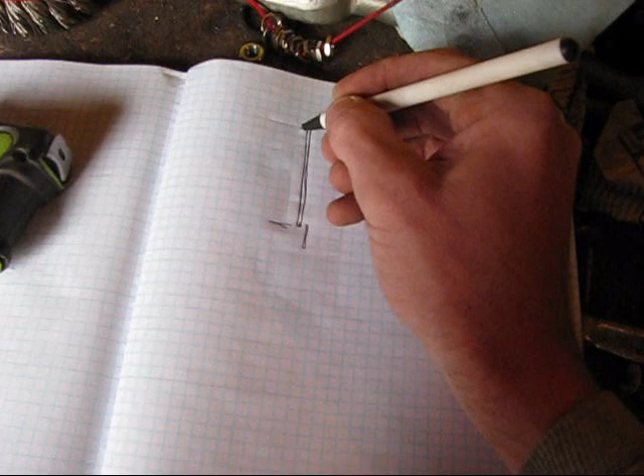So we're going to take one piece of this tubing, and it's .095 wall thickness, not 1/8 inch, a little bit lighter. That's about 6 feet long. We're then going to cut a piece of solid rod that's 1/2 inch thick at 14 inches. It's then going to slide inside of the tube.

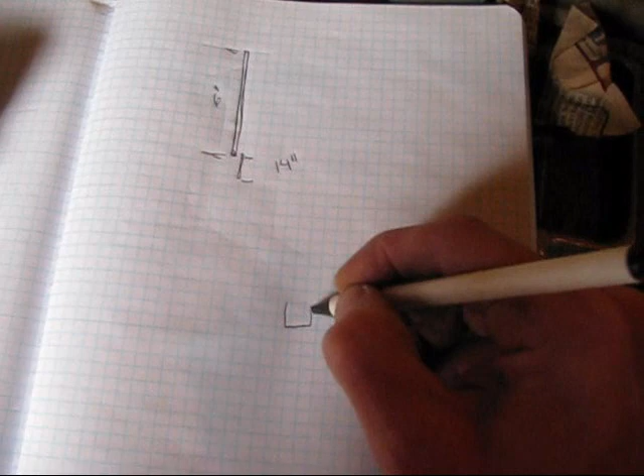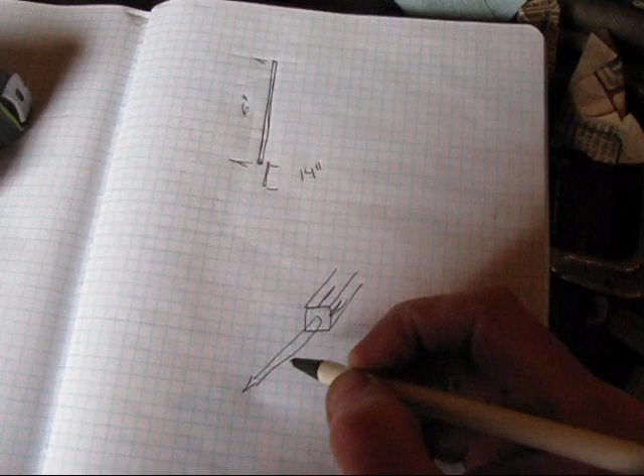Actually, what I'm going to be doing is cutting slots into the tube like that using my cutting wheel, and then I'll take my hammer and pound in the corners, so when I put the 1/2 inch round bar in there, which will then be grinded to a point so the thing will be able to stick down, once I pound those in, I'll weld all the way around that.

Then I'll be putting in, I don't know, maybe whatever scrap I have left. Well, no, let's jump to the first one here. The first top bar that'll be going out will be the same material.

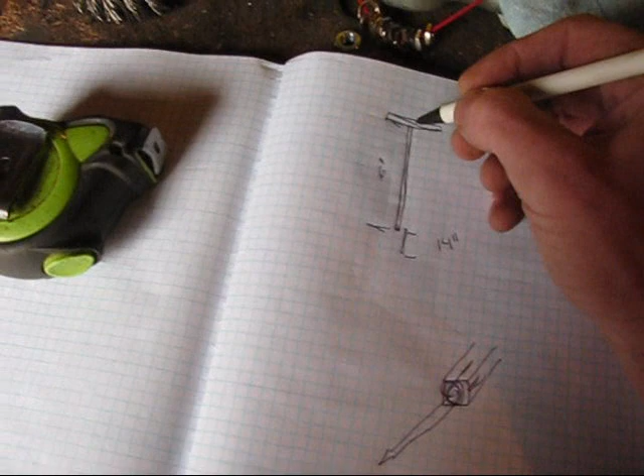It's hard to draw while I'm looking through the camera. Same material, 1 inch by 1 inch, .095. This will be cut at 21 inches. So we have 1 inch right here, and then 10 inches overhang.

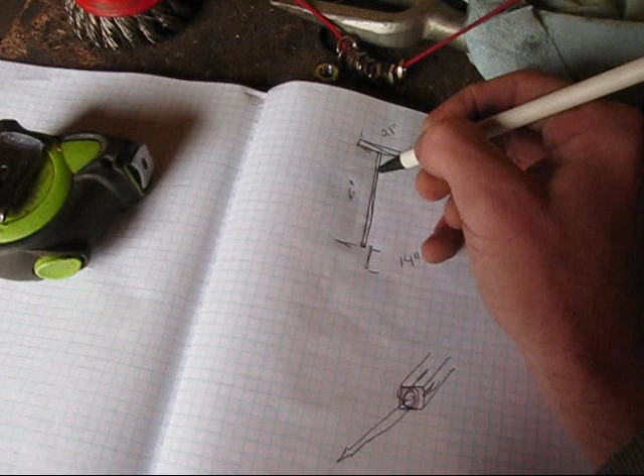Then we're going to come down, I don't know, a few more inches. I'll figure that out and explain it here as I go. And then we'll weld on another bar on one side and weld on another bar on one side. So we'll be able to put feeders right here hanging down, feeder over here, and then feeders right here for their birds.

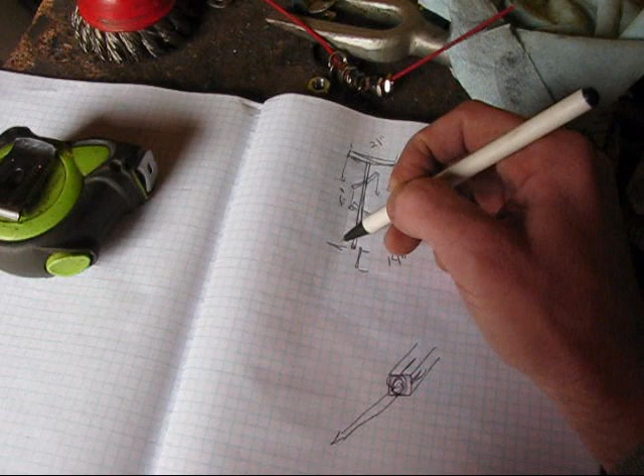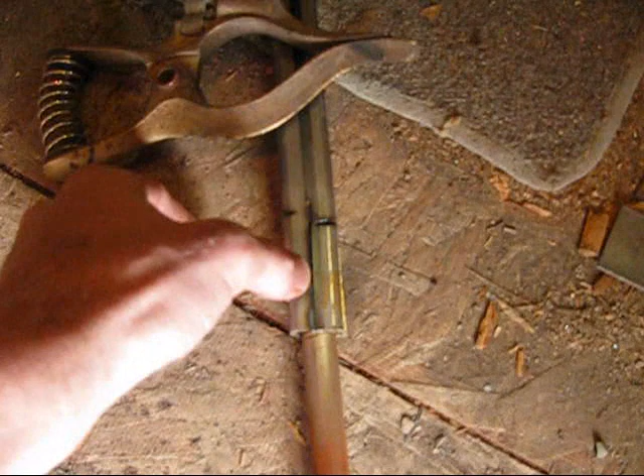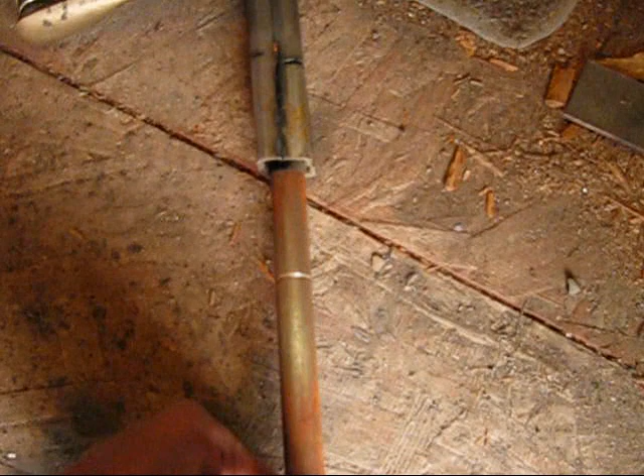Alright, just cut the grooves in there and pinch two sides together. So the bar that's cut at 14 inches is going to go inside of here 2 inches. It's sitting on a stack of staples there. So now all I got to do is line it up straight and weld it.

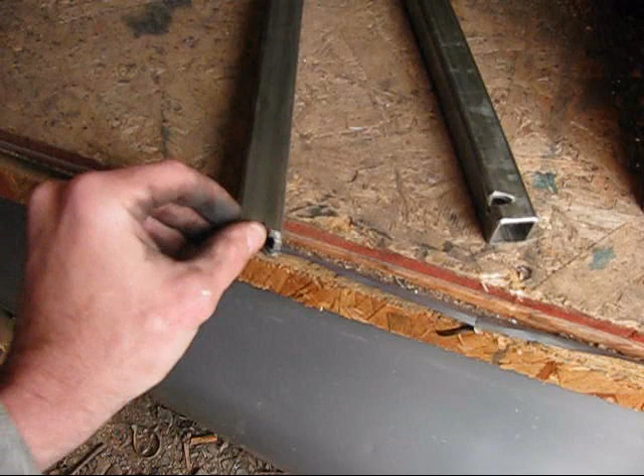Okay, alright guys, I decided to snazz this thing up a bit. Instead of just welding this on square, I pulled out my grinder and put 2 little notches on the side here. I'm going to put it like that.

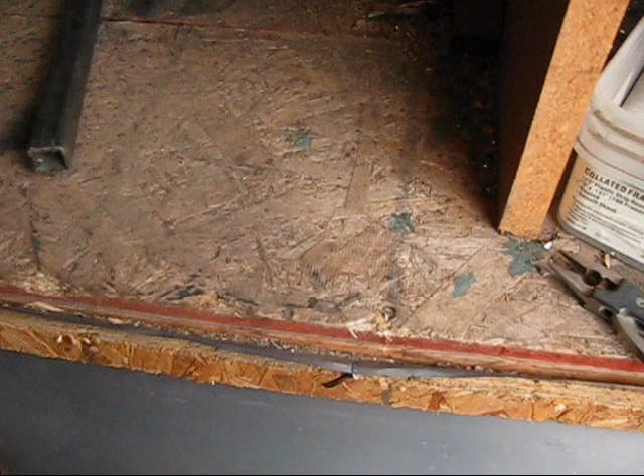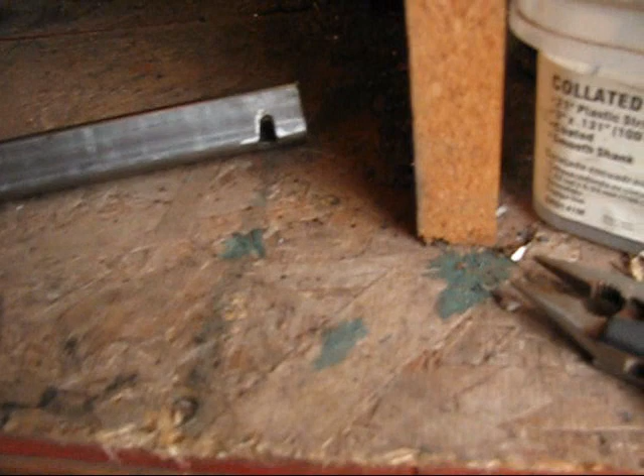Then I took my square tubing for the top, and this is cut at 21 inches. What I'm going to do is figure out where the center is at, right where that black mark is. And we're going to weld this as a diamond shape instead. Then those 2 slots will be where the wires are going to go for the feeders. So, yeah, let's weld this bad boy up a little bit.

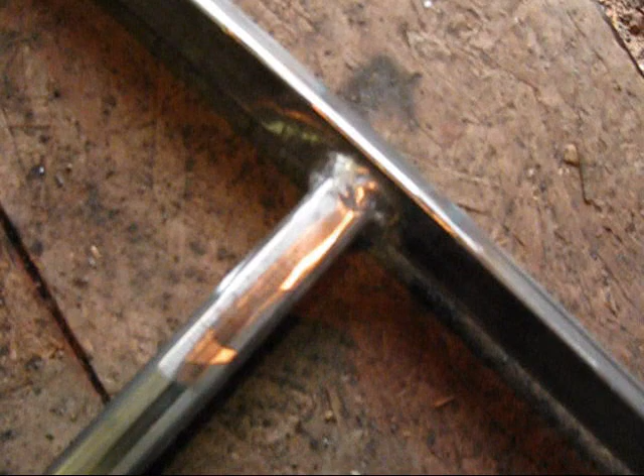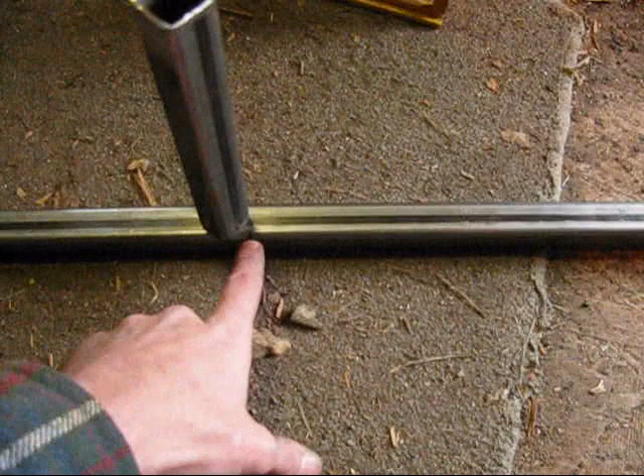Alright, well, we got that all welded up, and cut the grooves in the ends so they can put the wires through. So what I then did is measure from the tip here, measure down 20 inches and made a mark. Now I'm going to take a piece 8 inches long and weld that into place. Then flip it over, and weld another 8-inch piece on the other side.

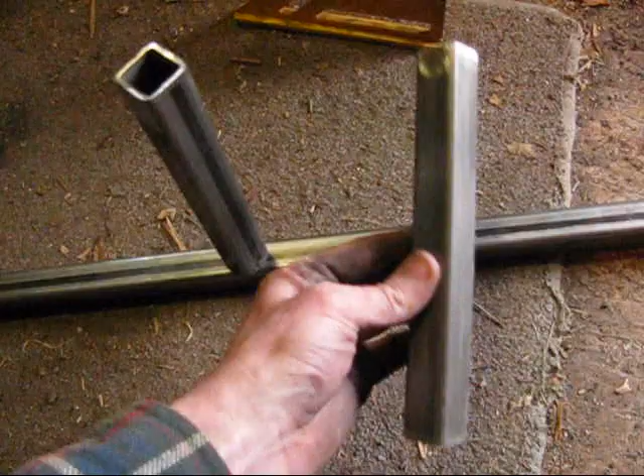Well, we got that all welded up and cleaned up, and I put the little notches in. I just took my grinding wheel and grinded right through one entire corner, then took one of my files and filed out the burrs, so I'd be able to take the wire and hook it right through there.

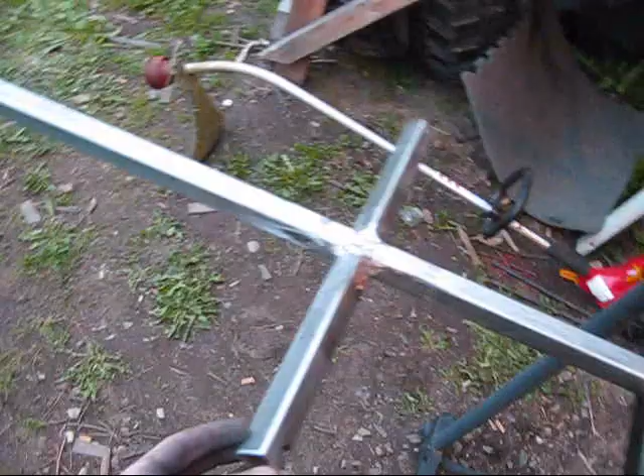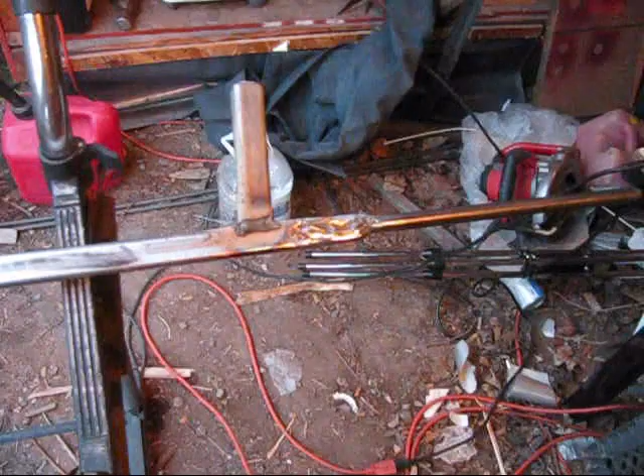I was thinking about capping these, but I don't think that's a very good idea. Down here it might be alright, but up here I don't want to cap these off, because in the event they don't have anything hung here, bees will start making nests inside these things. So I keep them open all the way through.

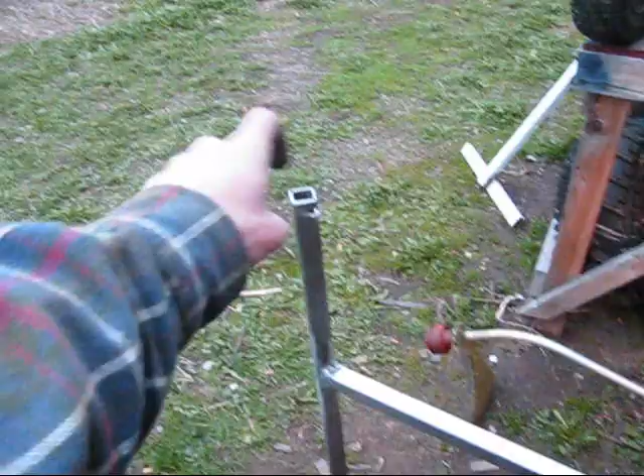So that way bees can't make any nests in the thing. You'll be able to spray wasp killer in there if needed. Of course, it is kind of a tight area, so I don't know if bees would do that, but you never know. I've never seen a wasp nest in a small area like that.

Wait, no, I have seen that before. I've seen them making a nest in the Manco go-kart, right in there. Yeah, they fly in there and make a nice little nest right in there.

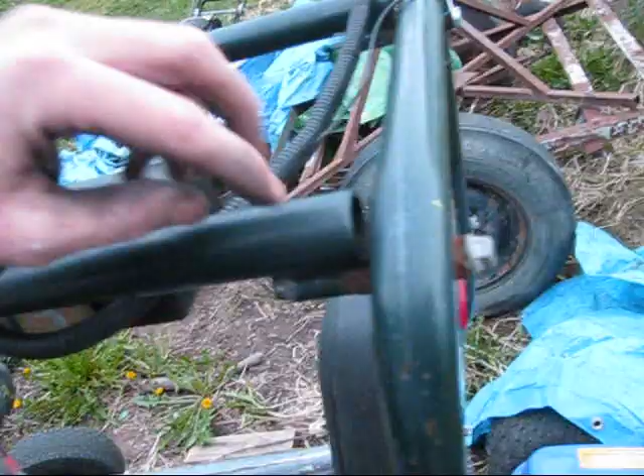Crazy. Oh yeah, and we've got a nest right here underneath the plastic, on the side of the building here.

So now I'll clean up this peg down here and then go ask him what color he wants me to paint it. All I've got is a little bit of black and some white, so I don't know.

Alright, well, I asked him if he wanted me to paint it, and he wants it green, so I just thought okay. He's going to run down to Walmart tomorrow and get some cheap green Rust-Oleum. We'll paint it green. And I just stuck it in the ground right there.

The foot peg will go all the way down to the ground, and it'll be about 6 feet high, with the bird feeders down about right here on both sides. Even as it is now, it's pretty damn stout, and that thing's only stuck in the ground about 4 or 5 inches.

And that bar is a foot long, and it's 2 inches. Remember, I cut it 14 inches, and it's 2 inches inside the square tubing and welded around there. So I'll be able to put his foot on there and pound it down in there.